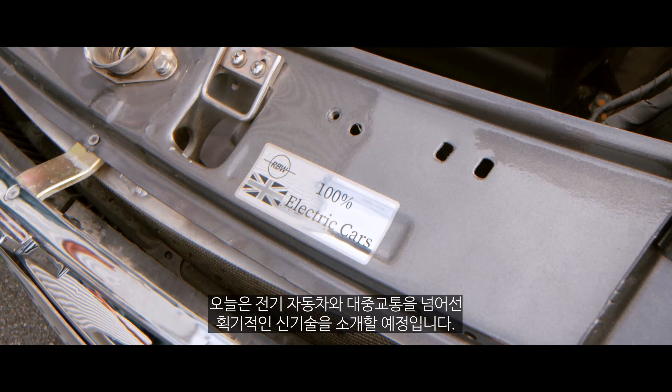But how do we travel, ship goods, or run our industries in a more ecologically friendly way? Today, we're going to go beyond electric cars and public transportation and see some of the groundbreaking new technologies that you may not have heard of.

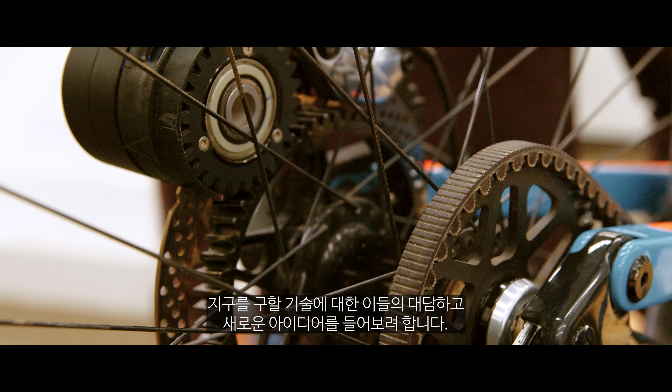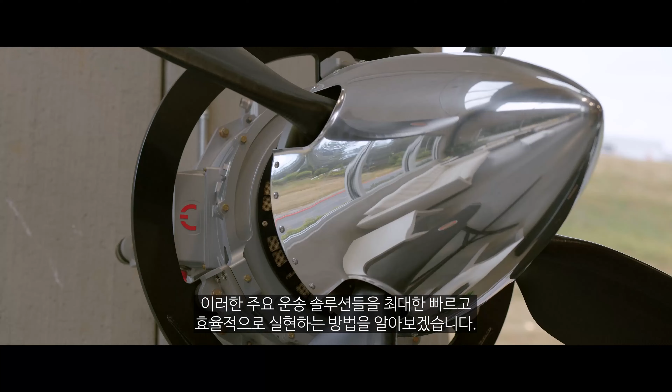We'll visit the world's brightest scientists, engineers, and inventors and see their bold new ideas for technologies that help rescue the planet. And we'll learn how they're using cutting-edge simulation software, like the kinds developed by ANSYS, to speed up development, reduce costs, and generally make sure we get these vital transportation solutions as fast and as efficiently as possible.

When it comes to electric cars, we've come a long way, literally miles. But the fact is, transportation remains responsible for nearly a quarter of global emissions, and personal vehicles are just one contributing factor.

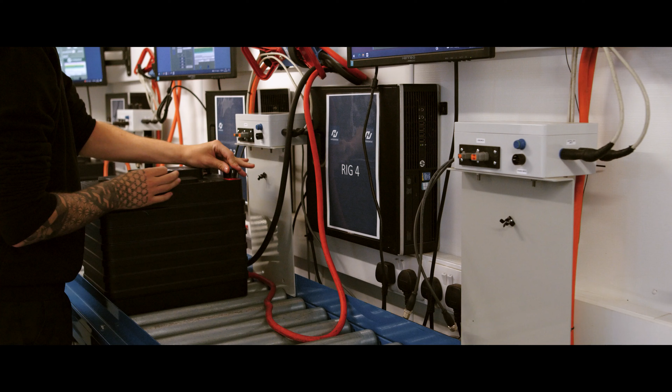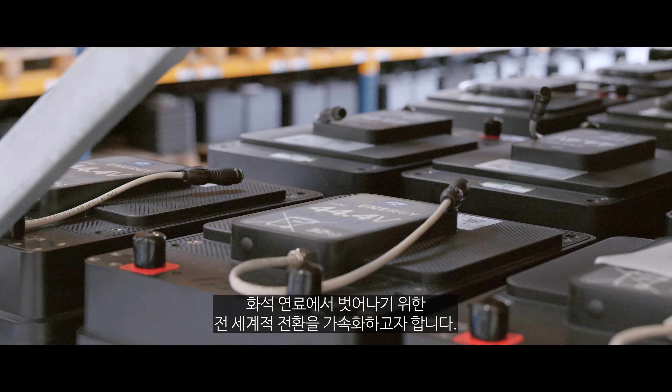Heavy machinery and rail, for example, still largely rely on internal combustion engines to operate. Turntide is looking to change that. With a diversified portfolio of solutions in electrification, energy storage, and electronics, Turntide seeks to expand the decarbonisation of transportation beyond the humble car and accelerate the world's transition from fossil fuels.

Batteries are living things, so when we look inside this and there's a cell, it's a chemistry. Chris Pennison has developed a reputation for delivering high-performance manufacturing. His mastery over processes has put Turntide in a position to deliver industry-leading electrification solutions that are both environmentally and economically sound.

So I think when most people think about electric vehicles, their first thought might be a Tesla or a Nissan Leaf, a car, right? Yeah. But you're not doing that, are you? You're looking more broadly. Could you tell me about that?

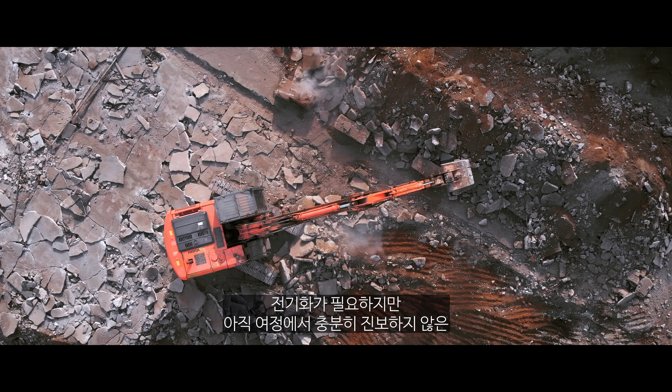Absolutely. What we're really interested in is what we call the long tail of electrification. So everything else that we know will need to be electrified, from construction vehicles, agriculture, autonomous guided vehicles, marine, aerospace, everywhere that needs to be electrified but maybe isn't as advanced on the journey that the OEMs and the passenger car market is really our target.

Okay, so say I was a customer and I had, I don't know, a construction vehicle. What would be the process then of me talking to you and saying, hey, I want this electrified? What would you have to consider, and what are the challenges involved in that? What we have to understand is what the capacity and the working requirements that we can offer you are.

So you get asked an awful lot of questions. Duty cycles, how often do you want to charge it? What will your customer use it for? Is it going to be used for 23.5 hours a day? Or is it going to be used for 8 hours a day? And then how quickly do you want to charge it? Well, that puts different types of challenges into the battery. So you have to try and understand that. And then we would say, right, this is how I think we can give you what you want.

So how do you actually do all of this? For me to be able to say to you, I can give a customer 8 years here or 5 years here or 2 years, lots of simulation. So again, before we even get to even saying, this is what you want, we can run the simulation. We can then do some of the design work. We can do the design to see if actually what we think will work.

We then step that through with the team that we've got here to take the simulation data, we'll model it, then we'll hard model it. So it links all the way through to the bit that actually when it ends up like this and it goes to the customer, it's gone through various iterations to give you, if you were the customer, that confidence that it's going to actually do what it says it will do on the tin. It's a bespoke designed cooling radiator. Okay, so that's basically blowing cold air through the cells and recirculating the...

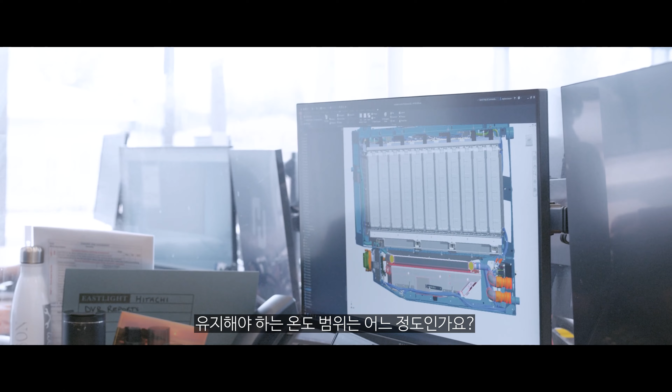What sort of temperature range then did you have to keep them within? We're trying to target 25 degrees Celsius, just to make sure that the cells don't degrade.

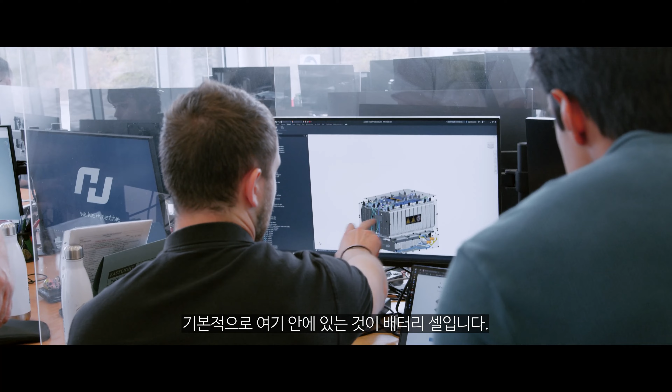Basically what we've got inside of here, these are the battery cells. So we've got 22 of them that will fit in basically 2 stacks. We've got our own PCB design, which is the battery management system.

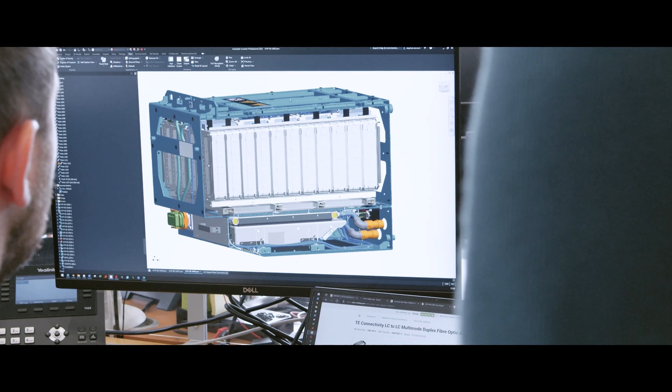Rather than then building everything, we run the simulation to make sure we can still get everything that we're trying to do in that same envelope with the weight that we're allowed, before we actually start to physically cut steel to a point really. And what you've got here is the battery pack.

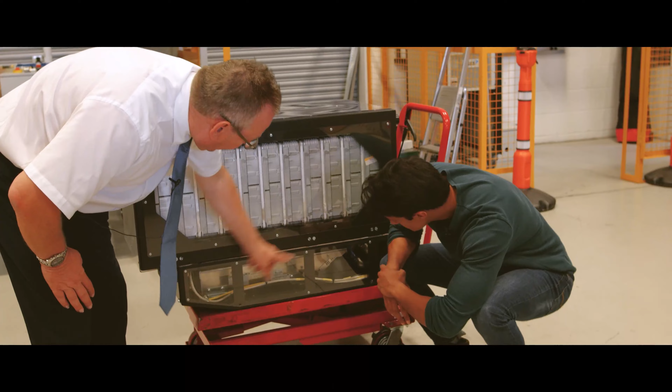So if you remember what he was showing you, the modules - so this is in effect the fuel tank. So this is the cell modules, the cooling system at the bottom here. And then what you've got on the top is the brain, the battery management system.

This is the output of in effect 2 years' work to get to this stage. And it's already been simulated for life, and we've done fire testing on these to make sure it reaches all of the correct accreditation. We're now at a point where these are in test vehicles, because now you've got to build miles up, and there's a year of testing on that before you even get to the production bit.

This is the last part, so if you think about it, we've had raw material come in, we've built it, we've followed the process, we've charged, we've discharged, we know it's all good. Then all the customers need to have, depending on who they are, their language put on their software, and that's what we do here.

So this then really brings them to life. This really allows customers to do - to your question, what will I do with this when you send this to me? Well, once I've put the language on, once we've done all of our checks, you will be able to then install it into your vehicle or whatever process you're using to allow it to work.

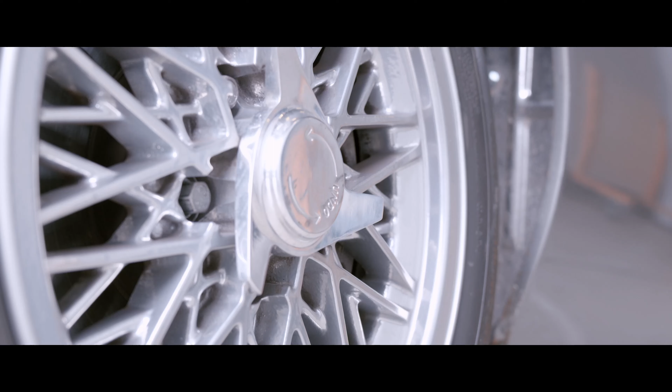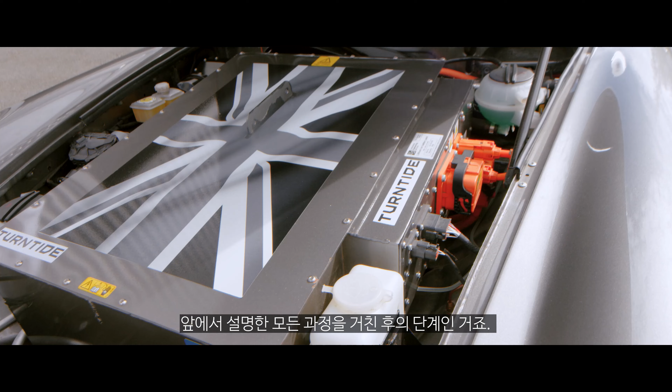So this is where it all ends up. After everything we've seen, this is the niche end of the market. So batteries that we've developed then go into this vehicle.

Awesome. So what happens, seeing as we're at the end, what happens to those batteries once you've used them? Okay, so we're not quite at the end. We get a life out of the batteries that are in this vehicle or our other vehicles, and we call it end of first life. So then we take the batteries back. We then have a secondary use for them, stationary energy storage, or we move them to another application. We put new batteries in here, the vehicle's as it was, and it'll run as normal, and then we continue to use the batteries.

So yeah, show me what this car does. Okay, so... we're ready to go? Absolutely.

It's so quiet. This is quiet. Yeah, and now we're ready to go. It is incredibly quiet actually. I was expecting it to be. I'm going to give you a little squirt along here now. Oh, ready? Yes, let's do it. Yeah, let's go. Oh, that's amazing.

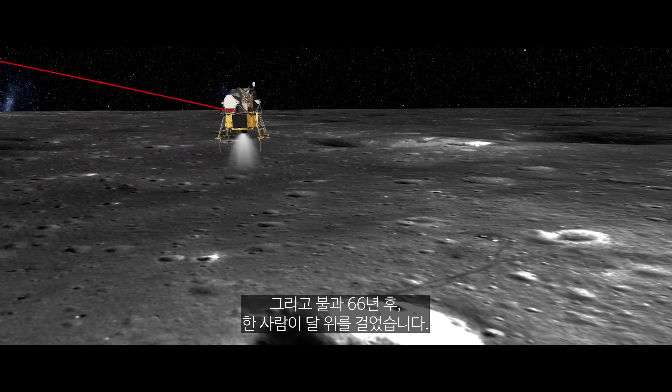In 1903, Wilbur and Orville Wright changed the world forever with a 12-second powered flight at Kitty Hawk. Just 66 years later, a man walked on the moon. Looking back at that history, our pursuit of aviation has been nothing short of incredible. But now we know that it comes with a cost. The fact is, air travel alone pumps over 1 billion tons of greenhouse gases into the atmosphere every single year. And as the world heats up in response, we need a solution now more than ever. So how do we decarbonize our aircraft? Well, MagniX is exploring how electrification can be applied to aviation, presenting a proven capacity to power a diverse range of aircraft and driving the world's transition towards electric flight.

An author and inventor with 5 patents to her name, Sara Roggia has worked extensively on the development of electrical machine technologies for aircraft. Here at MagniX, she leads electric propulsion system development, focusing on the design and delivery of electric power units for carbon-free flight.

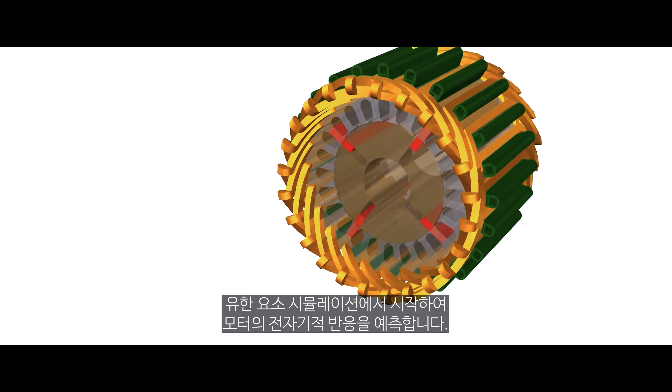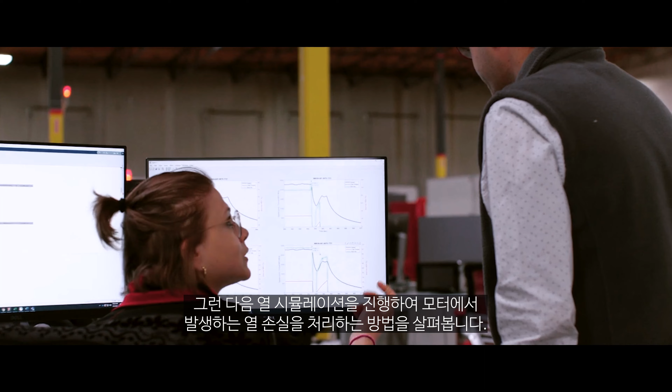For example, when we design the motor and the entire EPU, we have to start from finite element simulation to predict the electromagnetic behavior of the motor, then move to thermal simulation to see how we extract the heat from the losses produced by the motor. Then we integrate the rest, like the control, which is part of the inverter behavior. We simulate everything at the system level.

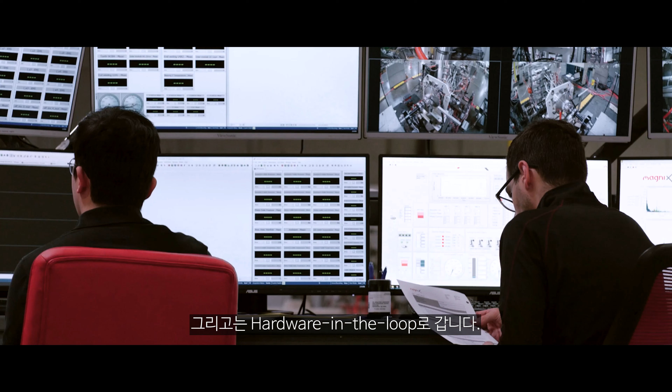Then we move to hardware in the loop, where we simulate part of the system and the rest is hardware. Finally we move to the complete integration of the EPU with the final propeller configuration we'll have on the aircraft. There's no more calculation by hand you can do. We need finite element simulation even from the mechanical part, to simulate the stress around the motor and the mounting parts. Everything is basically done by simulation. We cannot fail this.

Obviously this is having a massive impact on emission reductions, or has the potential to. Are there any benefits beyond the environmental? Mainly costs. A ticket, instead of costing $500, will cost an estimated $50. And also noise - you can have aircraft close to your hometown and you won't have the huge noise that comes with a fuel engine. The electric airplane will be much quieter than that.

Reliable and eco-friendly, the bicycle has been around for quite some time. But what if you've suffered an injury, live next to a really steep hill, or have a longer commute? Over the past decade, we've seen once-impossible uphill climbs conquered by the e-bike - a bicycle supported by an electric powertrain. But how do we make this tech lightweight, powerful, versatile, and accessible to everyone? That's just what Bimotal is doing.

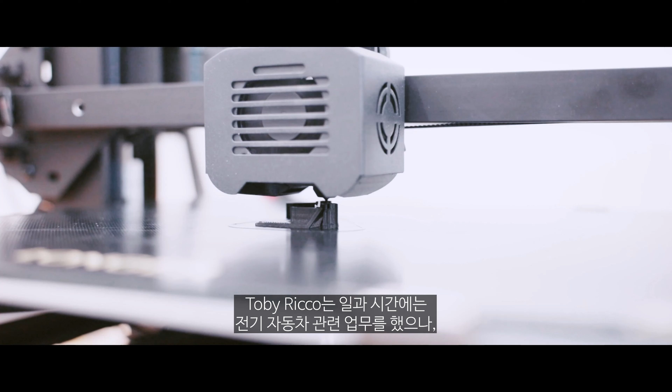Working on EVs by day, Toby Ricco spent his evenings and weekends researching to find the most efficient combination of power, weight, and versatility in an electric assist system for bicycles. The result of hours of research and entrepreneurial spirit is right here: Bimotal.

I started staring at my bike literally hours every night after work, and eventually the idea came to me. I was like, wow, you can put a lot of torque through a disc brake. I wonder if you can change the direction and get some propulsion that way.

You're effectively creating a device that you can attach to almost any bike and it becomes an electric bike. So how does it work?

This is the Bimotal Elevate. The way it works is we have a motor here, and a multi-stage gearbox that reduces the torque on the motor so we can make the whole thing smaller. Then we have a proprietary gear that drives torque through the bike's disc brake. To make a bike electric, we swap the disc, add a couple bolt-on mounts over the brake caliper. Basically any brake mount can handle a lot of torque, so it's a great way to make most bikes electric without any real modifications.

Can I have a look? Absolutely. My first impressions are it's much smaller than I was thinking.

Does this attach to every bike, or what are the limitations? Right now we're launching it and targeting more mountain bikes because there's a much higher rate of compatibility there. But eventually we're trying to make it compatible with pretty much any bike that has a disc brake, and the general trend of the market is actually moving towards disc brakes.

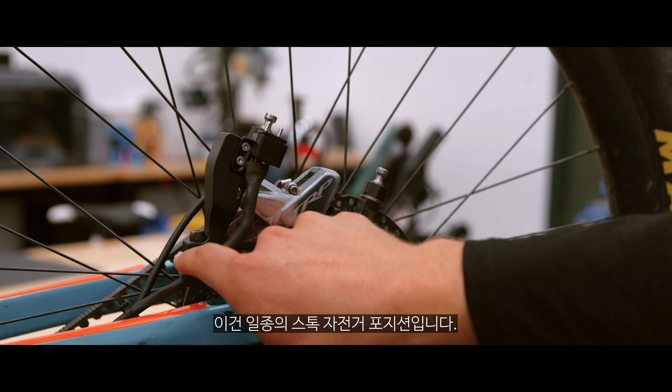This is a stock brake caliper, in a sort of stock bike position. This one aluminum piece is designed by Bimotal, and these quick connects and connector are also designed by Bimotal. It latches onto these two studs here, and this is the custom electrical contact connector we also designed, which lets you take it on and off rapidly.

That was very quick. So how much power does it generate? The Elevate system can actually do even more than 750 watts. What a lot of people don't know is they think these systems are power limited, but it's actually torque that's the challenge. Providing high torque is something that's difficult to do in a small package.

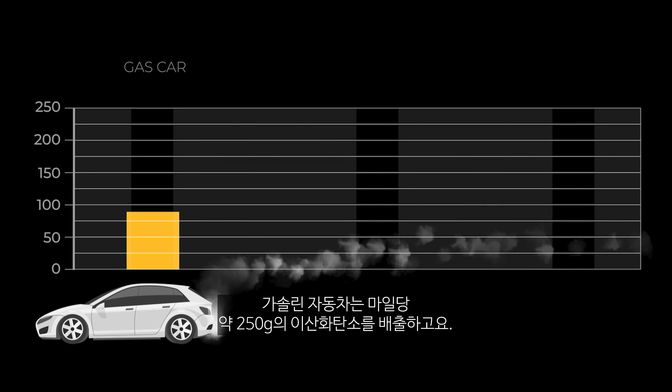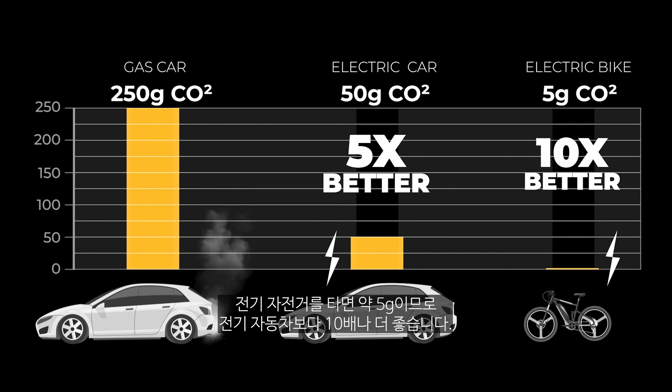Let's talk about the bigger picture, because driving cars is still kind of the go-to form of transportation, and by and large those cars are producing a lot of CO2. Clearly, if we cycled more, that's got to be part of the solution. Road transportation is still the single biggest block of CO2 generated. A gas car is about 250 grams of CO2 per mile, an electric car is about 50 grams per mile — a 5 times reduction. You get down to an e-bike, it's about 5 grams, another 10x better than an electric car.

Step one is making bikes more fun. With the Elevate system, you get on this thing and it's just a blast. Improving the metrics of the bike system — the range, the weight — and reducing cost by making it so you don't have to get a whole new bike, you can just add this system. All these things will kind of add up and make bikes a little more approachable.

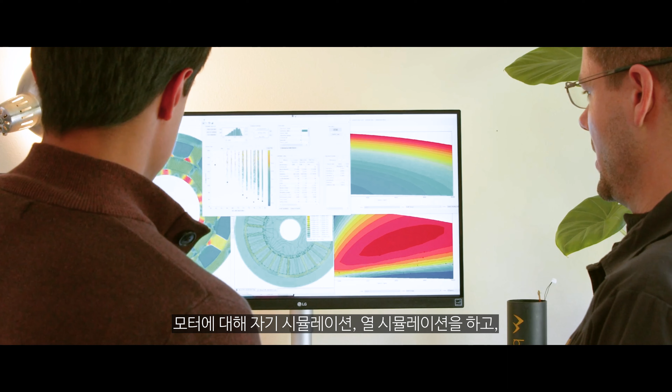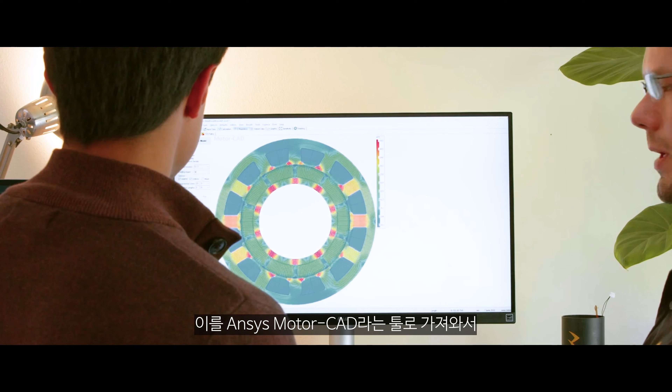We have this cloud of motors. We do magnetic simulations, we do thermal simulations, we look at noise, and any other limits of material selection and how we can wind the motor. We put that all together and come up with a few good motor candidates. Then the next step, which is even more exciting, is we get to take this into a heavy-duty simulation tool called Ansys Motor-CAD, and basically map flux lines of how the magnetics work on the motor. We can check the thermals of the motor, and also get an early estimate of how loud the motor might be.

A bottle-sized battery pack and ultra-lightweight motor allows even the most casual cyclist to generate over 750 watts of power — enough to run your microwave. But how does this technology handle a real challenge, like a steep incline, a rather common sight here in Northern California? Let's find out.

we will not slow down.

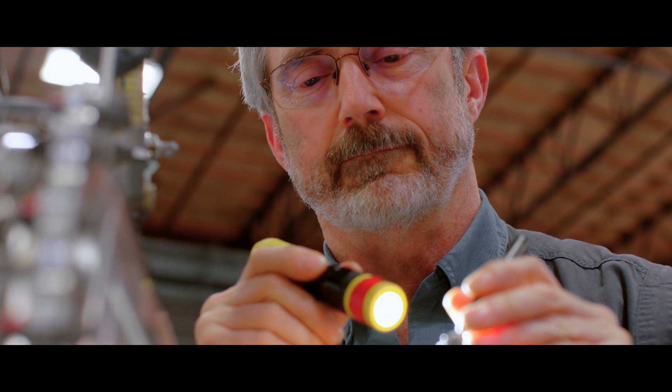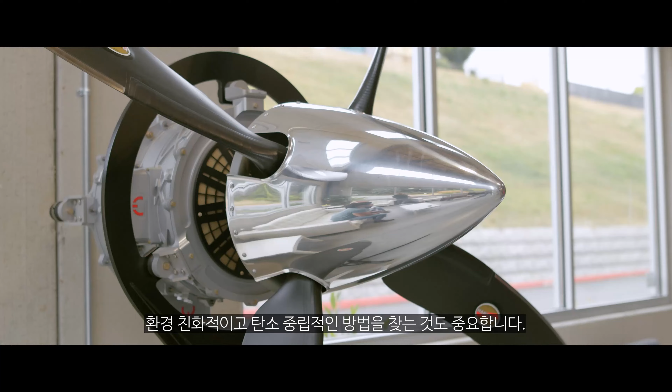As we continue to advance our capability to travel greater distances and at greater speed, it is crucial that we do so in ecologically friendly, carbon-neutral ways. Which means our brightest scientists and boldest innovators must be armed with the advanced tools and technology necessary to expand what's possible, predict the future, turn wildest dreams into reality, and rescue our planet.